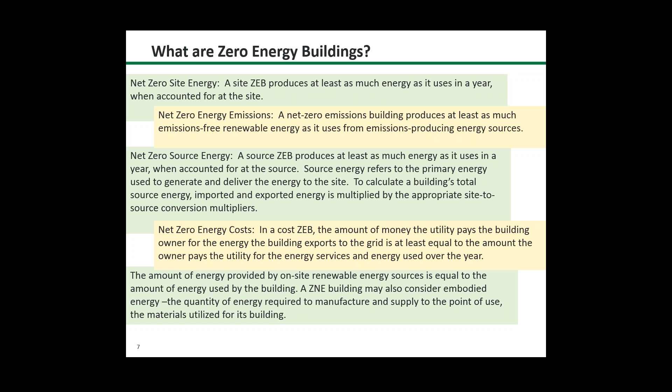And a number of different organizations, so this is leading to some confusion, but there's also a lot of good work that has been done and that the foundation for zero energy building is built on, especially work done by the National Renewable Energy Lab, made up a lot of what we did and provided a strong foundation.

We also see a number of states, California moving to define zero energy and put it into regulatory requirements, Massachusetts, Delaware, Washington State, a number of federal agencies in response to regulations that they're subject to, such as the EISA Act, are coming up with their own definitions, and then a number of non-governmental organizations are also developing definitions, and there's more coming.

Our goal was to try to use these different foundations and build an industry-accepted national definition that the Department of Energy could publish, developed in concert with a wide group of stakeholders, that could help encourage new construction and major renovation projects, help to support program and policy goals, and ultimately help to achieve high levels of energy efficiency in a built environment.

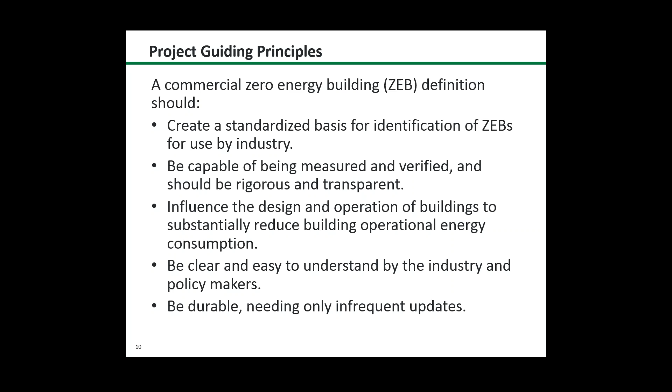We followed a process which involved really doing some research both in literature and with subject matter experts, convening stakeholders, sharing with them our work, taking their input. We created a second set of draft materials. We have conducted a public comment period, which has been completed, and now we're working through that. And here's what we've come up with in terms of a zero energy building definition.

A zero energy building would be an energy efficient building where the actual annual source energy consumption is balanced by on-site renewable energy. Now, we definitely heard that this needed to be able to cover more than just individual buildings. So one of the things we did was craft this in such a way that 'building' could be replaced by campus, portfolio, or community, and we could still establish a zero energy goal and way to meet it. Within this definition, there's some critical concepts: source energy, actual, annual, and on-site renewable energy are all important terms and components.

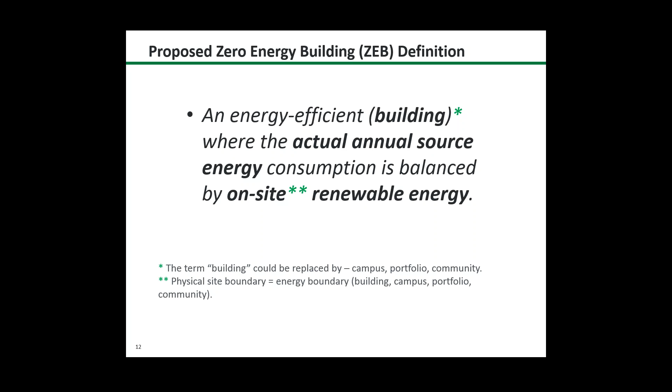We identified a set of nomenclature that support the definition, and this is all going to be available in the document that has been circulated already quite widely and will be published at the end of this process, which has a clear definition for each of these component parts.

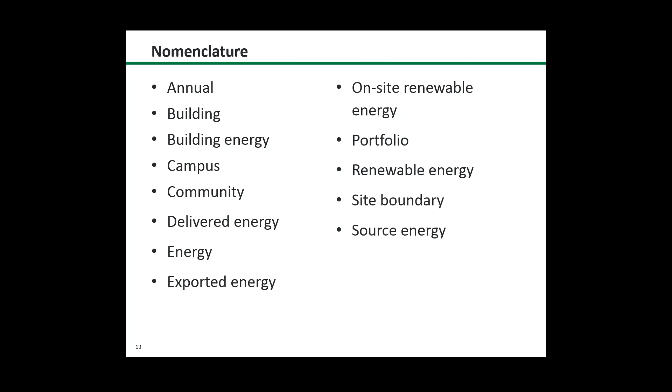These parts needed to be put together in a way that they could be measured and implementation could be done using this definition, we felt. So the first thing was to have a clear boundary over which the energy consumed could be offset by the energy generated. And that boundary is where the measurement of delivered energy to the site and exported renewable energy from the site is measured. And it was important that we do that in a way that it could support building, community, portfolio, or campus.

The measurements needed to be done in a way that the energy consumed was balanced by the energy generated, and that that was measured on an actual basis. It was operational, it wasn't modeled, and we established an annual time period as the period for that measurement.

And then the final key component was that source energy would be the metric, and this allowed for different energy sources to be compared equally, for the focus to be on achieving renewable energy and not on the source of energy used. We're working on what should be the appropriate national conversion factors, such that source energy delivered times the conversion factor can be offset by energy generated times the conversion factor, and you can thus achieve zero energy. So this is how the calculation is made.

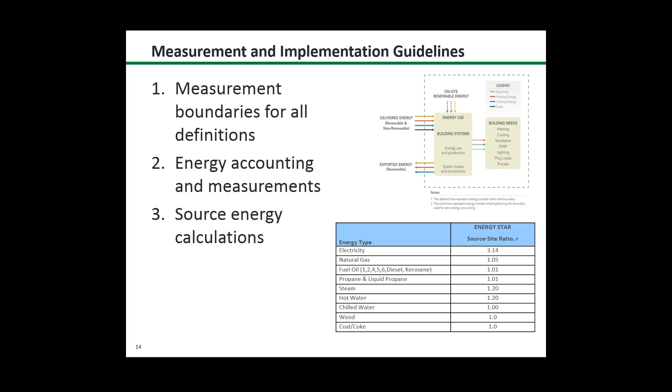So we have conducted this process. We're now completing the definitions, the nomenclature, and guidelines. We're looking at a few of the issues that came up in the public comment period, over which we received over 70 comments, which has helped greatly. We're looking at issues like renewable energy credits and net and zero energy ready buildings as we complete that work. We expect to publish the results by the end of July, and we'll be making those available on the DOE website and the NIBS website. Our goal and our hope is that this will contribute to energy efficiency and energy performance of buildings. Thank you.

Great, thank you very much, Roger. It's a little bit of the Wild West out there with regards to zero energy buildings, so it's really great to have some of these definitions and a little bit of guidance put in place by trusted organizations.

Let's turn our attention now to the McDonald's and RMI project, which looks at a very energy-intensive food sector, the food service sector, and asks if zero energy is possible with current technologies. Roy, can you tell us what you found?

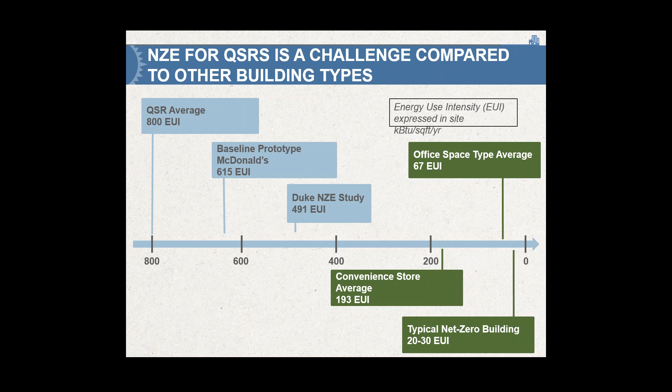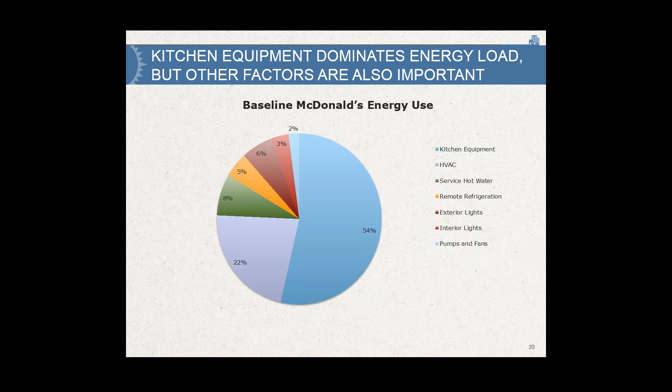The team's energy modeling over the course of this project really confirmed other McDonald's data that in a standard restaurant, more than half of the energy goes through the kitchen, including the hood exhaust. The remaining energy use in a standard McDonald's is primarily HVAC, service hot water, lighting, and walk-in freezers. So the story here really is all about the food, as you might have thought at the start. Tackling net zero then requires that McDonald's look closely at the unique energy requirements of each piece of equipment in the kitchen to re-examine how to deliver the menu most efficiently, while assessing how the kitchen interrelates with the design of the rest of the building.

To get this much energy efficiency really required a holistic whole systems view on a McDonald's restaurant that the team took over the last 6 months or so. Starting inside the kitchen, a mix of currently available tech equipment and select future designs can cut the kitchen energy use in half. Then carefully managing outside air through the shell of the building, or the envelope, as well as the hoods, which are pretty critical, cuts both the heating and the cooling required.

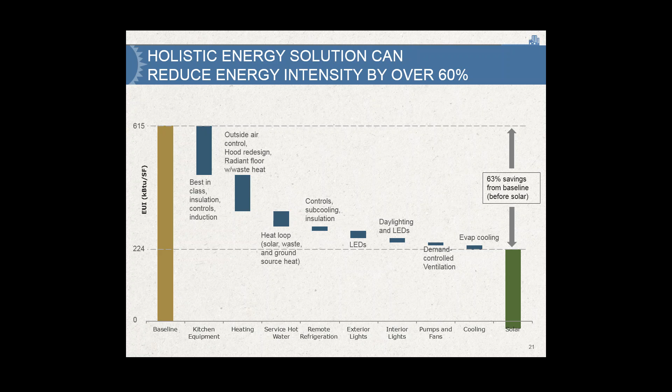For the team, the kitchen equipment really required a fairly novel approach, quite different than designing a standard office building. Energy modeling doesn't individually assess plugged-in equipment with a standard piece of energy modeling software. Often it just depends on a watts per square foot that you plug into a schedule. However, with the expertise of Fisher-Nickel and really critical prior sub-meter data that McDonald's has collected, we were able to assess individual pieces of McDonald's equipment and examine their patterns across a typical day.

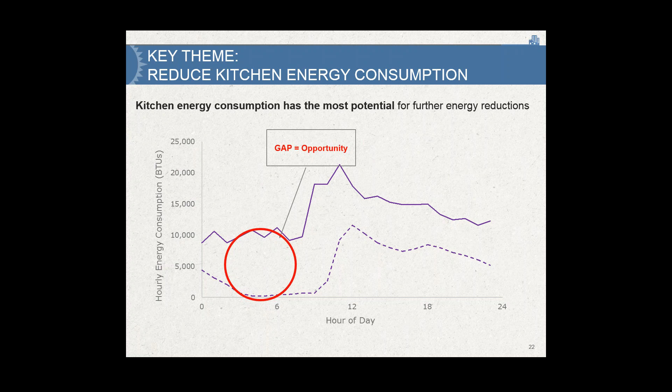We grouped all those possible improvements for kitchen equipment into three categories. The first, those that are commonly available, meaning they're used in quick service restaurants today. Second, cutting edge, which are minor modifications to existing equipment, like, say, adding insulation or lids to a fryer. And third, future technologies, such as, say, induction cooking, that would require R&D and quite a bit of time from suppliers in tandem with McDonald's to develop.

So big savings can come from what's available today. That was a key finding of our study. One chunk of those savings come from switching key pieces of equipment from gas to electric, which may save site energy but can certainly have a higher operating cost. Other improvements take little incremental cost to save energy but do need support from equipment suppliers. Very important to bring them to the table in this effort.

So cutting a quarter or more of the energy used by this kitchen equipment could save tens of thousands of dollars a year for a McDonald's franchisee or a corporate-owned restaurant. Next slide, please.

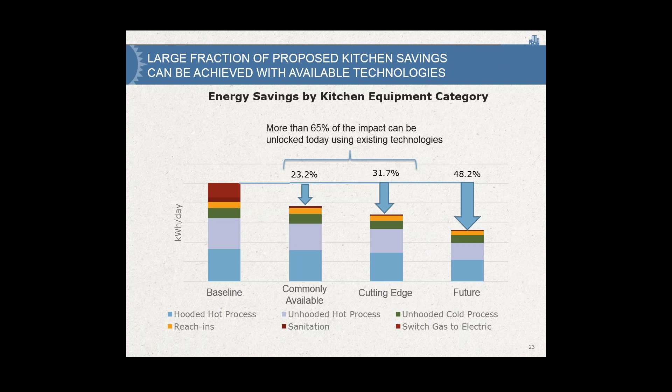We've talked about the savings, and I hope many of you have been asking, well, then what's all this cost? So in parallel with identifying energy opportunities, the team estimated overall and individual technology costs. When we put all those costs together, the end result is that a McDonald's net zero restaurant for the locations we assessed would have a negative net present value, meaning it's not cost effective today.

However, much of the total energy savings, particularly in the kitchen, are cost effective. That's another key finding. There's a lot of cost effective efficiency.

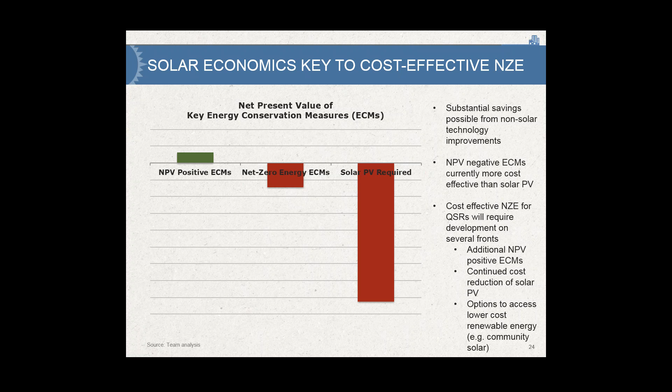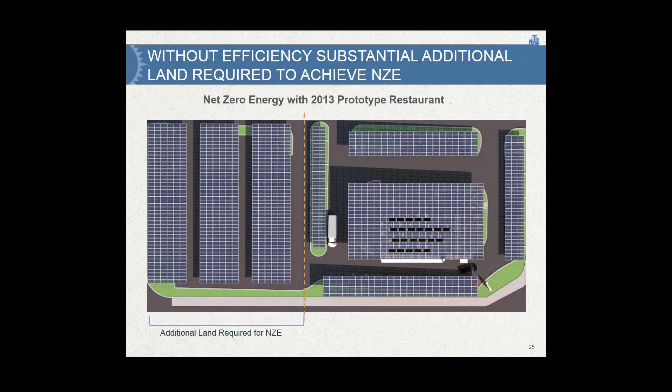With efficiency, McDonald's can fit all the solar on a standard site in the 3 locations we assessed around the country and meet code requirements, say, for emergency vehicle access and getting around that site. The darker panels you might see on the roof are the solar thermal panels. The panels displayed here would allow McDonald's to reach a site net zero status in a typical year.

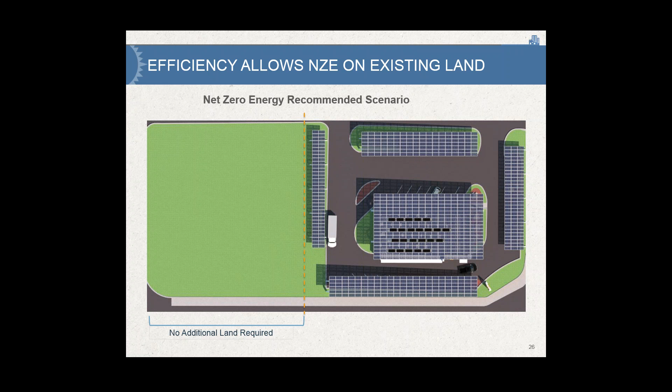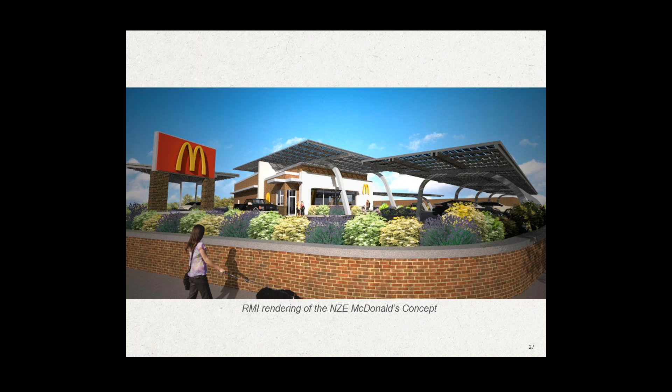As you can imagine, we're very excited about the study and the energy conservation measures that were the outcomes of the study. I'm not going to go into those specifically, but I did want to share with you several of the key themes that came out of the study. In the interest of time, we'll only cover several of them.

The first theme is systems thinking and integrative design. Most equipment in QSRs is typically designed in a standalone form to do only one thing, using a single unit of energy to deliver one outcome. In this standalone form, while we've made a lot of progress in increasing efficiency, we feel only marginal efficiency improvements are left. From an integrative design and systems thinking perspective, we believe this will result in equipment that delivers multiple benefits for the same unit of energy previously used, and is key to unlocking the needed efficiency gains to achieve a net zero restaurant.

The second theme here that's very important is efficiency before renewable supply. In some of the slides shown earlier by Roy Torbert, you can see the difference in the outcomes of the physical site that might be needed and the amount of solar PV that might be needed if we're not myopically focused on driving efficiency. So even though we've already accomplished much in this area, the study revealed we still have a lot more opportunity, especially around the kitchen equipment.

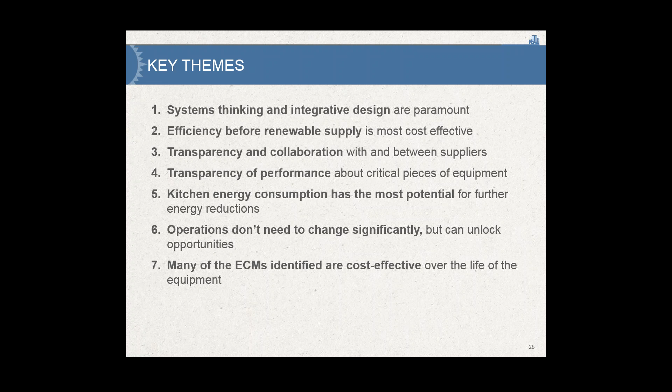In terms of next steps, our focus in the short term will be to put together a roadmap of the things we need to do over the next few years by reviewing and prioritizing the recommended energy conservation measures, and then to start working against those measures.

Some of the energy conservation measures, such as instant on, will require us to engage not only our suppliers but also the broader industry in order to bring about the needed changes. From an efficiency solution standpoint, solutions that have a strong business case are likely to become integrated into not only our new restaurant prototypes, but would also be made available for our existing restaurants in the system.

And clearly, again, we're very excited about the NZE study and feel that once we are ready, it will make sense for us to build an NZE restaurant in one of our markets, since it would serve as a great learning laboratory to help us validate new technologies, as well as to continue to refine our approach to net zero as well as overall energy efficiency.

And with that, I will turn it back over to Holly Carr.

Holly? Great, thank you, Roy. I would like to volunteer Washington, D.C. for that prototype restaurant, so I'll just throw that out there.

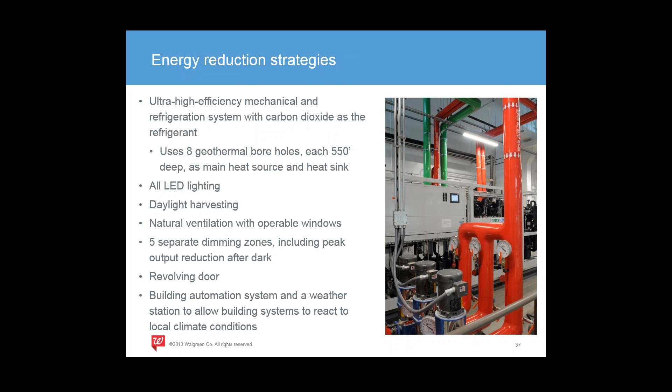This is a picture of our mechanical room and that transcritical CO2 heat pump, with glass from the sales area looking up onto that mezzanine so you can see what's going on. All the piping is color-coded, and there's a chart showing what's going where, so our customers can interact with what we're trying to do at the store. We felt that was important to engage the community and get their involvement in this project.

This is what that system looks like. So when McDonald's was talking about existing, cutting edge, and future technologies, this lies between cutting edge and future—no system had been built like this at the time. A few have been built since, integrating a CO2 transcritical heat pump with geothermal technology, which had only been attempted once before, in Northern Europe.

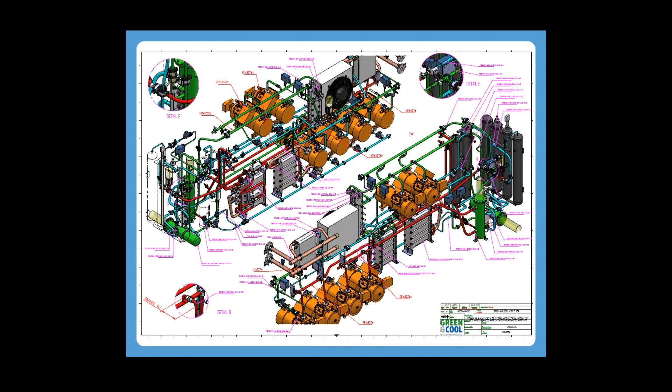This is a quick schematic of how you integrate the entire thermal envelope of a building into one piece of equipment instead of several. There's the geothermal, highlighted in green, and our chilled water in blue, which couples with the geothermal system via a buffer tank, so that if the water temperature in the geo system is adequate, we don't have to run the chilled water system at all. We also handle our heating loads and domestic hot water through one package system, keeping the complexity reasonable to operate in a retail store.

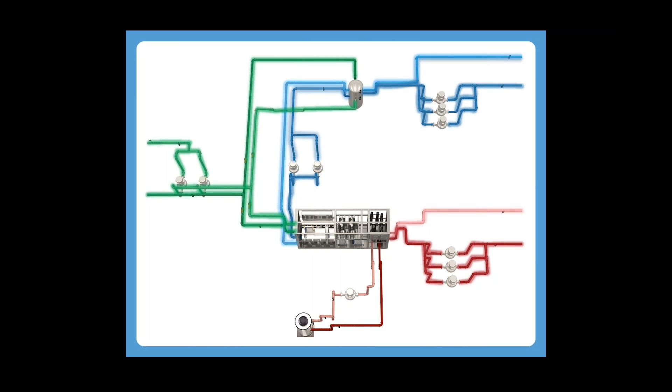We did a little bit of a different spin with LED lighting, as we targeted an initial lighting power density of 0.8 watts per square foot and ended up with 0.9. The original lighting design actually came in at 1.35 watts per square foot, which was higher than our typical fluorescent lighting package.

We use an optic pattern right on the LED chip to focus the lighting right at the product shelves. So we got the same product lighting intensity on the shelves that we did before, but we're just not getting as much light on the floor, which we don't really sell anything there, so we didn't care.

We were able to reduce our HVAC load by 2.3 tons and reduce our lighting power usage by 30%, all by just targeting lighting where we needed it and away from where we didn't.

So this is a picture on the inside of the store. You can see some of the different LED lighting fixtures and the clerestory windows between each roof plane. Those open to provide our natural ventilation strategy.

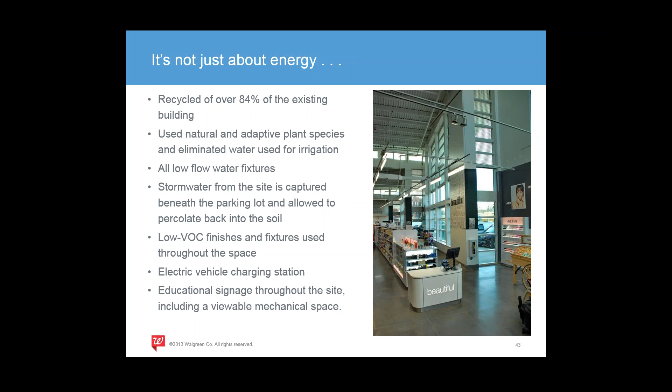Along with what we were trying to do at the time, we really wanted to tie this building together with our brand image of being happy and healthy. Being in the facilities department, we don't have a lot to do with our operations group, and we wanted to say that as much as we could in terms of what does happy and healthy mean for the built environment today.

You can see our detailed energy model on the very right-hand side, and you can see we're quite above that detailed energy model in the first 12 months of operation. But like I said, that included the polar vortex, which increased our energy consumption quite a bit over typical. Right now we are actually tracking towards net zero.

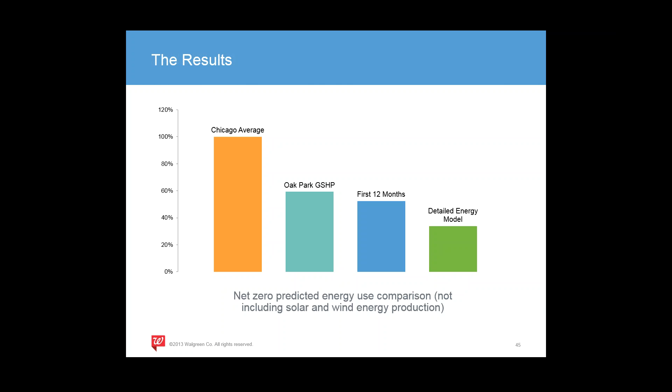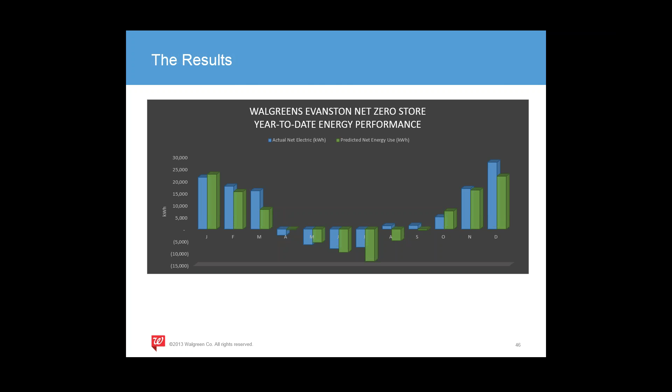This was our year-to-date performance for the last calendar year. You can see that there are some months we're way off and some months that are targeted right on. Most of that had to do with identifying different technologies in the store that were malfunctioning, had broken, or weren't working as intended. So we're constantly evaluating the building in terms of how it's operating to get it to where it's supposed to run.

So we had targeted a 49 EUI for consumption, a 54 for production, equaling a -5, or being net positive. After one year, we're actually operating at a positive 20 EUI, so we're still using energy, but it's roughly 80% less than a typical store in the Chicagoland area.

After replacing some of the refrigeration compressors, repiping some of the systems, diagnosing some malfunctioning equipment, and getting some things set up the way they were supposed to be—which didn't happen at the beginning because of the escalated construction schedule—we do think that within the next calendar year we will achieve net positive.

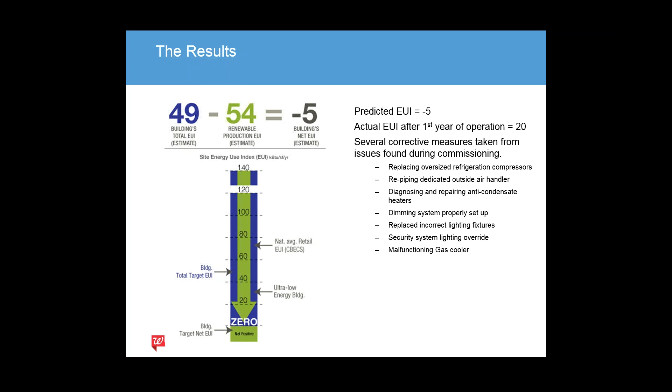Great project, and I know you've had many visitors, including folks from DOE who have already come by and want to learn about this landmark building and help move this effort forward.